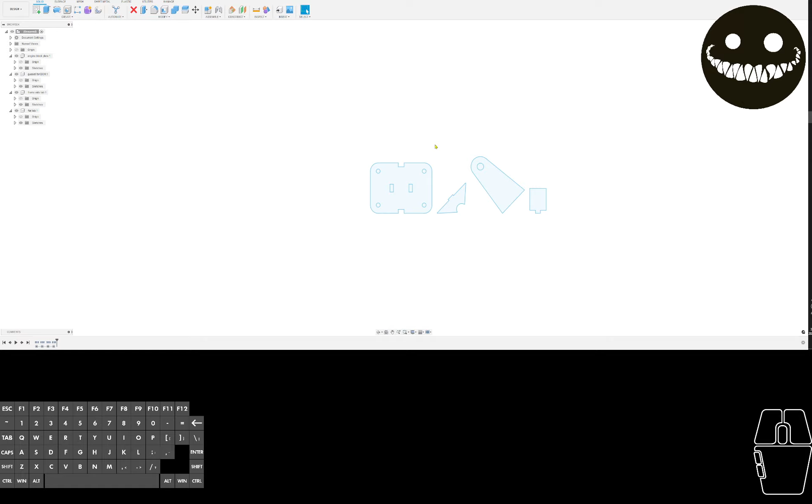3 will be cut twice. I'm going to see which 3 are cut twice. Well, these 3 must be cut twice, I guess. So there's a couple ways you could do this. I would extrude everything first.

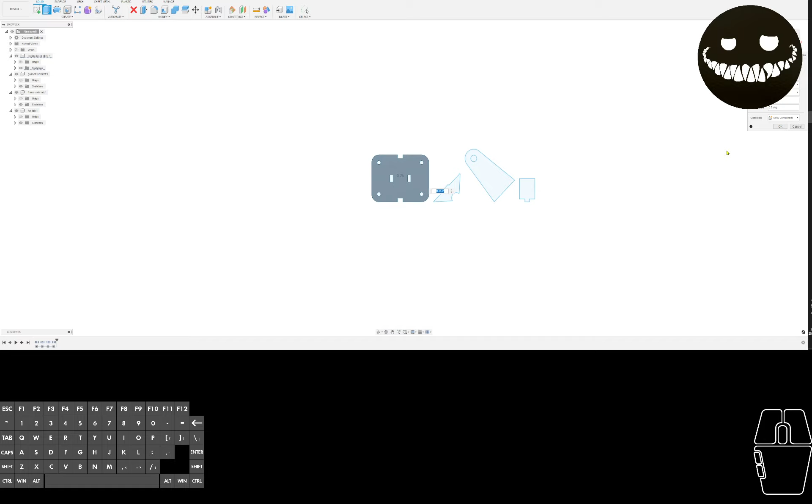No, you're not going to let me extrude from different sketches, are you? Well, that's fine. Let's say it's 1/4 inch material. I'll have to extrude from each one individually. I guess I could just go straight to doing a component from here. Yeah, that's exactly what I'll do. I'll extrude and go straight to a component. 1/4 inch. Just do that again a few times.

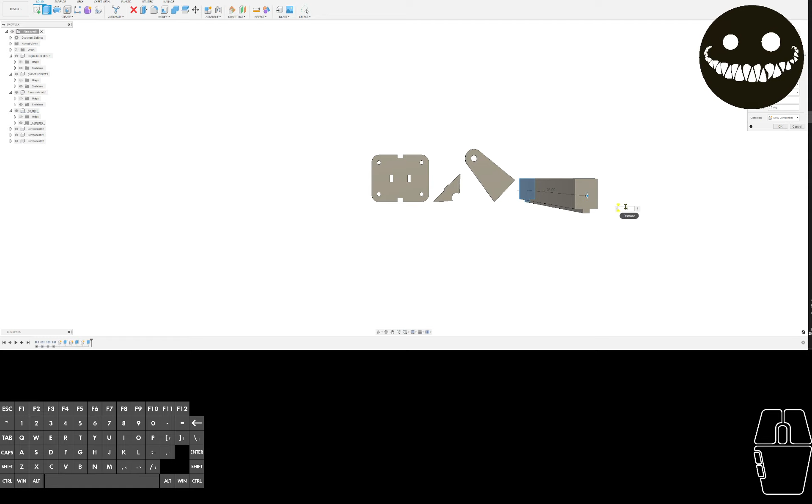But it's okay if they're in their own sketches. That's totally fine. All right, and I want to copy a few of these. So let's copy a few of these.

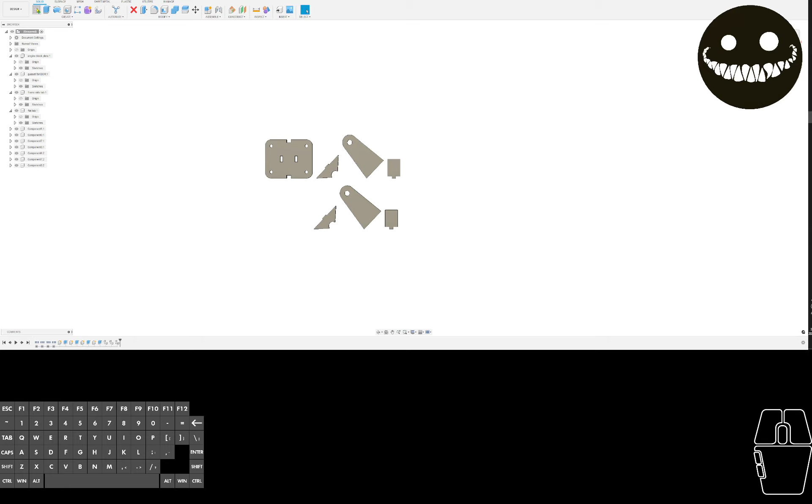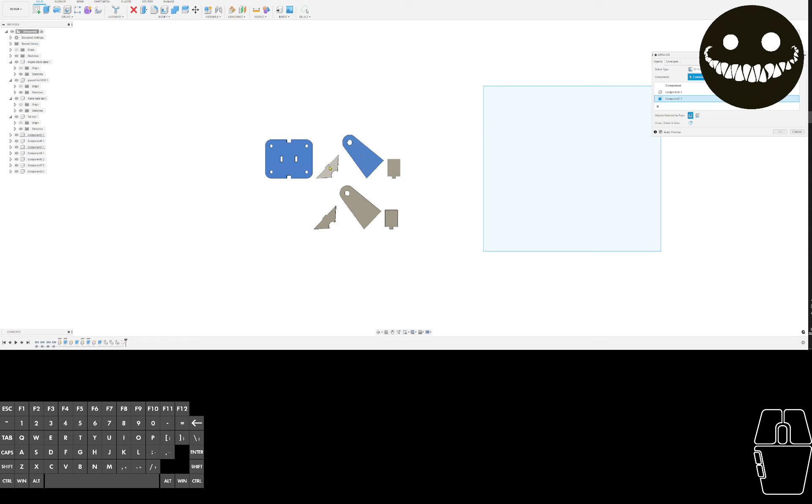Good. Now, if you have the paid version, you could use arrange here, so you're not wasting material. Oops. I was just trying to create that sketch on the XY plane. There we go. Just gonna draw kind of an arbitrary square. Use modify, arrange. Select these pieces. Good.

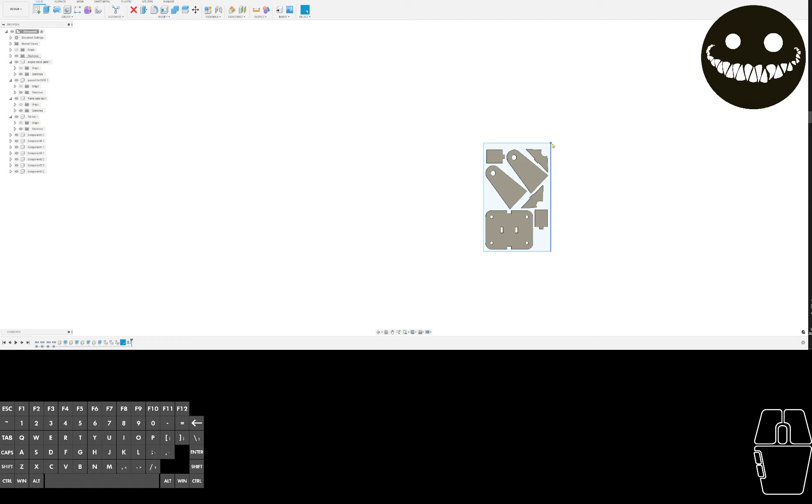Okay, and then I could just adjust this depending on how my stock is, if I have different sizes of stock around the shop. So that's a super convenient way of doing it. But yeah, I think you were talking about that each one had its own sketch over here in the browser bar, because you brought it in as 3 separate sketches. It's fine. You could have opened a sketch first.

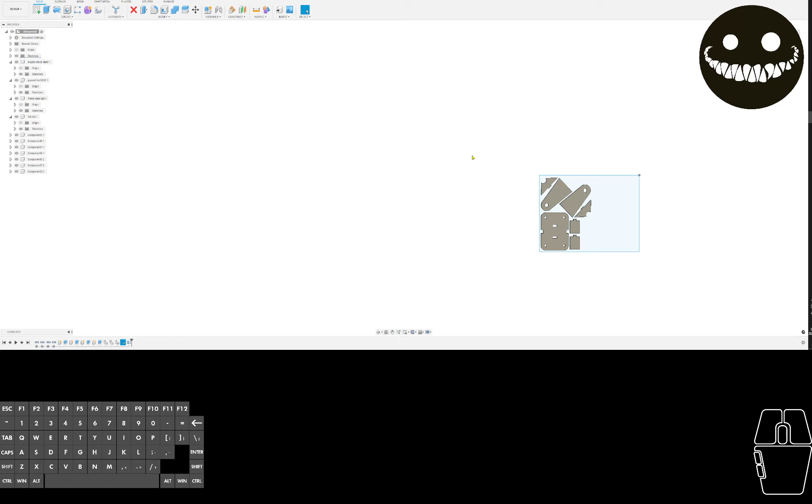So another way to import that would have been, let's say you have a DXF for each one of these parts. What I'm going to do here is save these DXFs separately like you would have had them. So save that as engine block plate 1. And then I'll save this sketch here as gusset for DOM, is that what that said? DOM1.

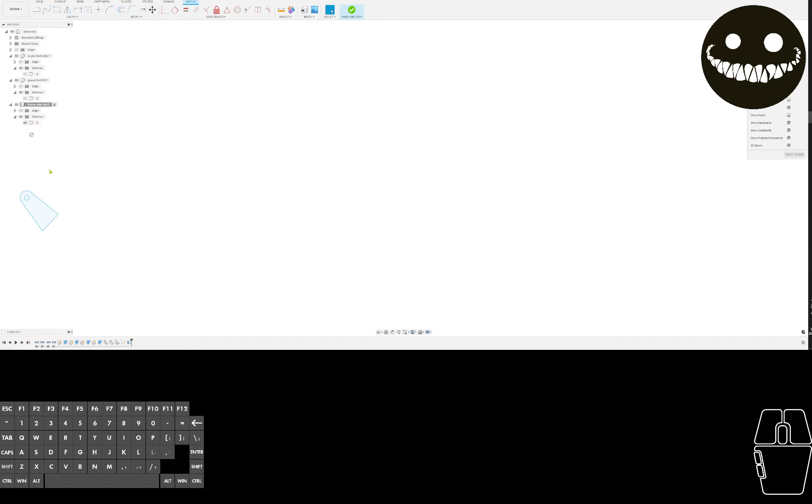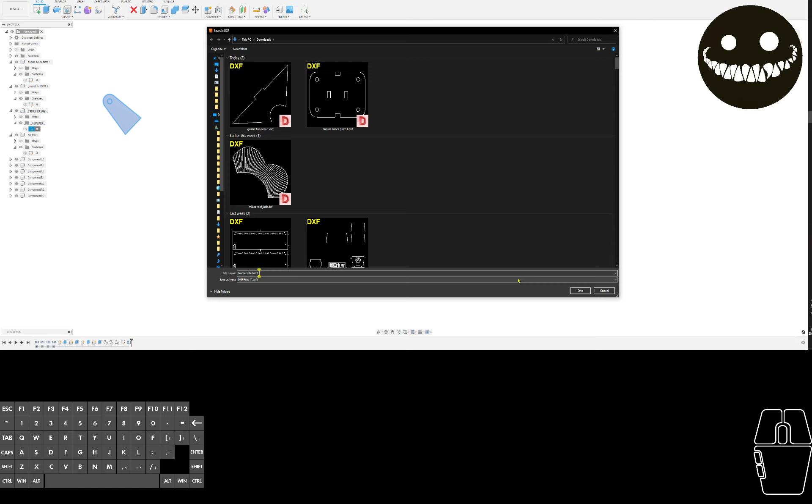Take this one and I'll go edit sketch again. Not edit sketch, excuse me. 1, 2, 3. I'll go into save as DXF, and that was called frame side tab 1. And the last one, save as flat tab 1.

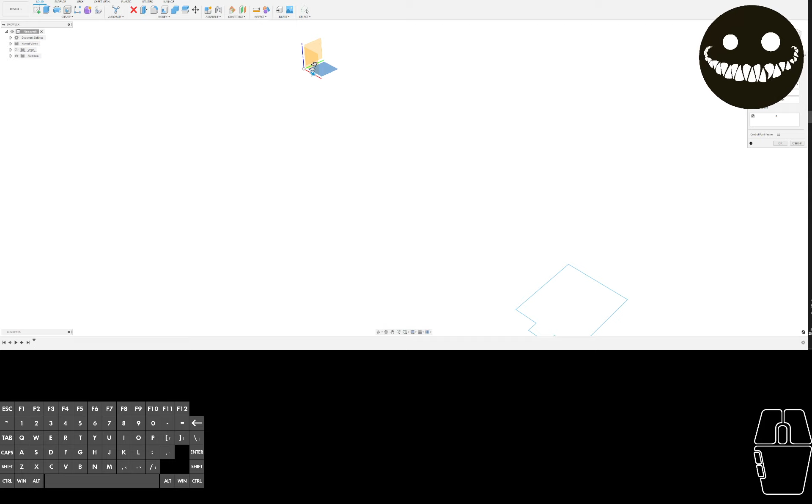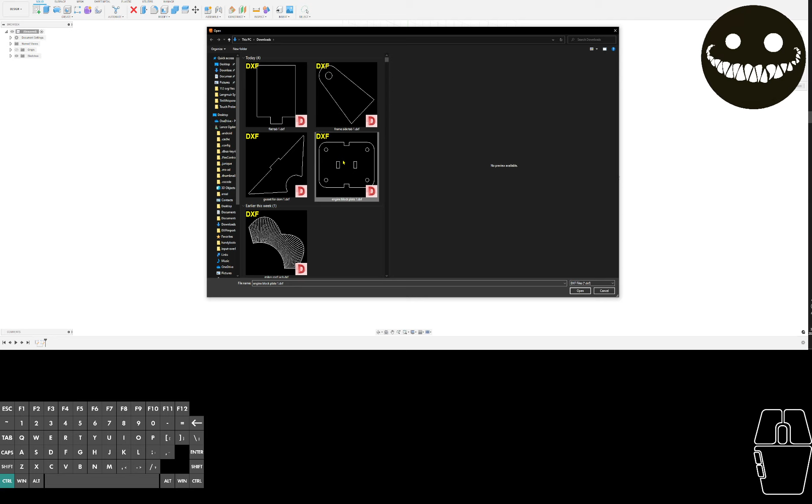Okay, so let's start a new one as if we were doing it the way you started with. You probably just went insert DXF, insert this tab on this plane. And then went OK, and then went insert DXF on this plane. Okay. Can you do more than one at one time? I don't think so. Not in this. Yeah. So the other way to do this would be

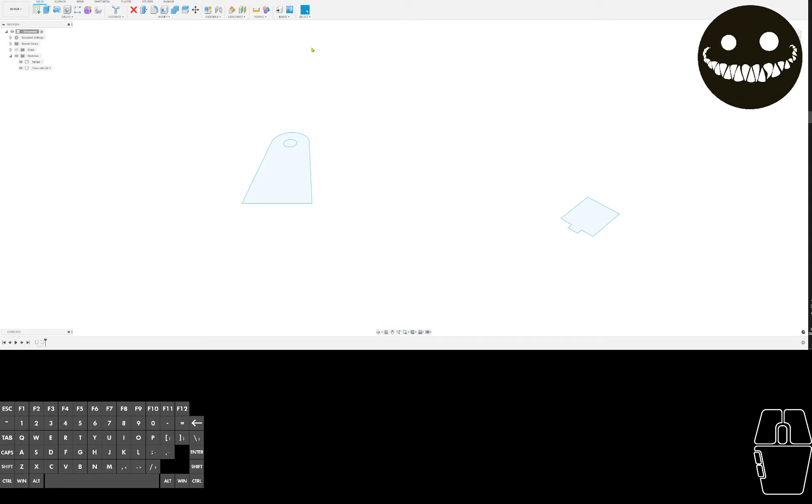so then we're ending up with a different sketch over here for each one, or they're ending up as a separate whole component. I think you could insert too. You might have done that. Let's see what you did over here. Not insert, but just open them. And it only wants to open one at a time there too. But I'll show you how I like to do it.

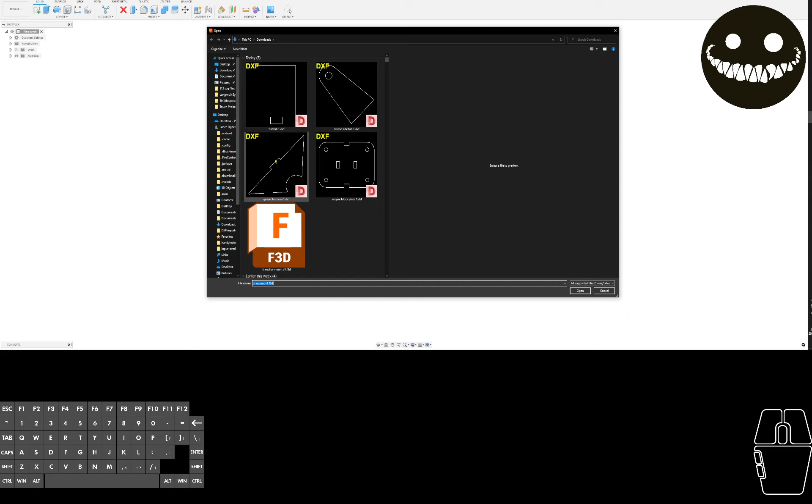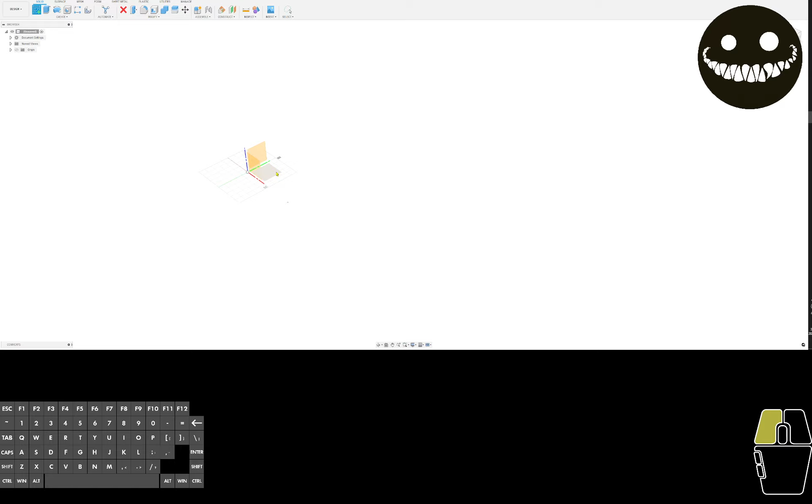Good. Anyways, let's go back here. We're going to make a new sketch on the XY plane, and then I just insert all of them right here. So they just all end up in the same sketch. Open. Okay, it's good. And then I can insert the next one.

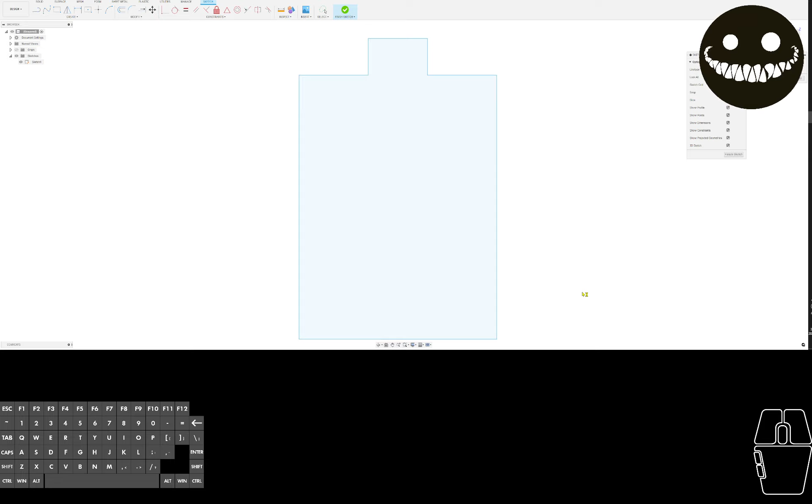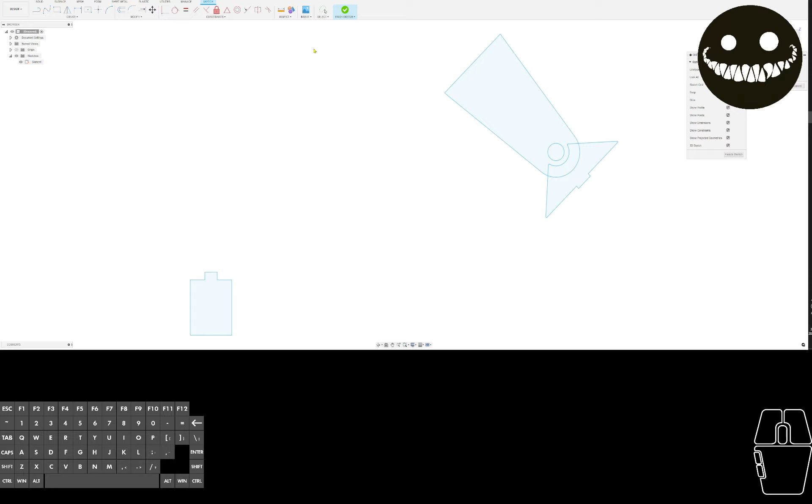Insert the next one. And then they all end up in the same sketch, which may or may not be beneficial to you. Oh, I see. It even shows how it's supposed to fit in there. Insert DXF. Okay.

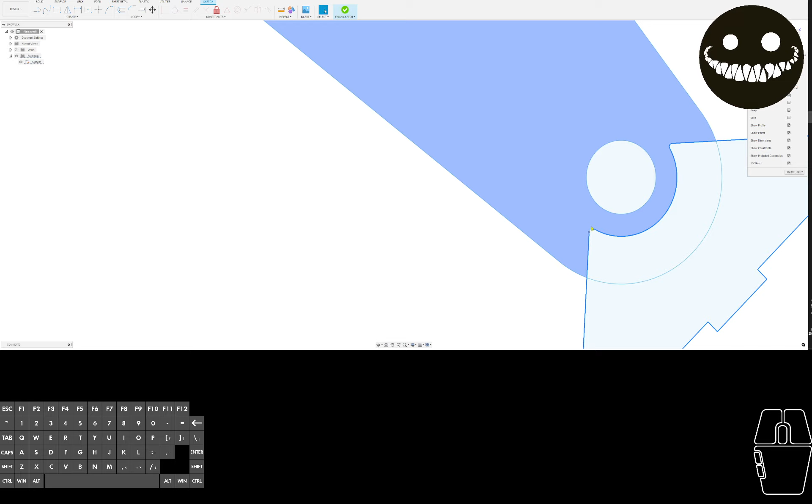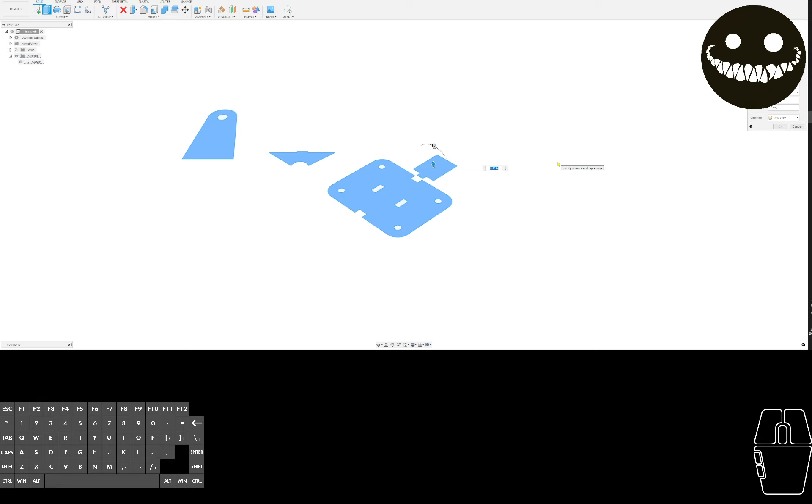Okay, you could do it that way and just extrude from here. We'll be able to extrude all these at the same time right now. And then I just can copy the ones we'd need extras of.

Come on. Move - I want to move bodies this time. And copy.

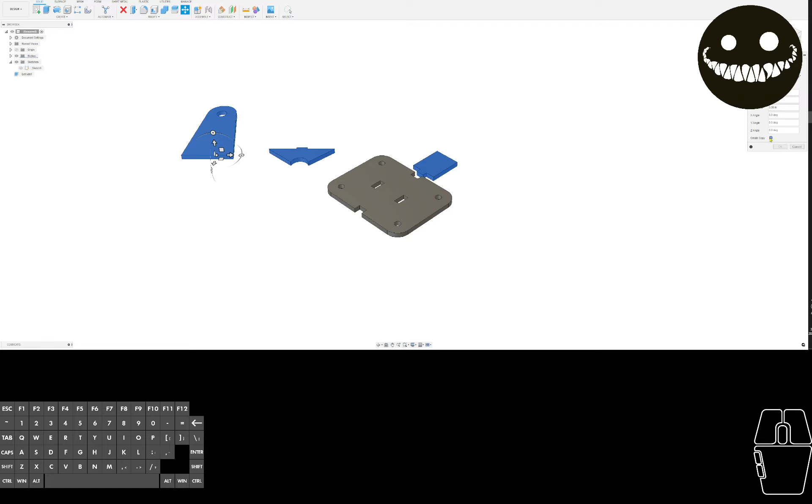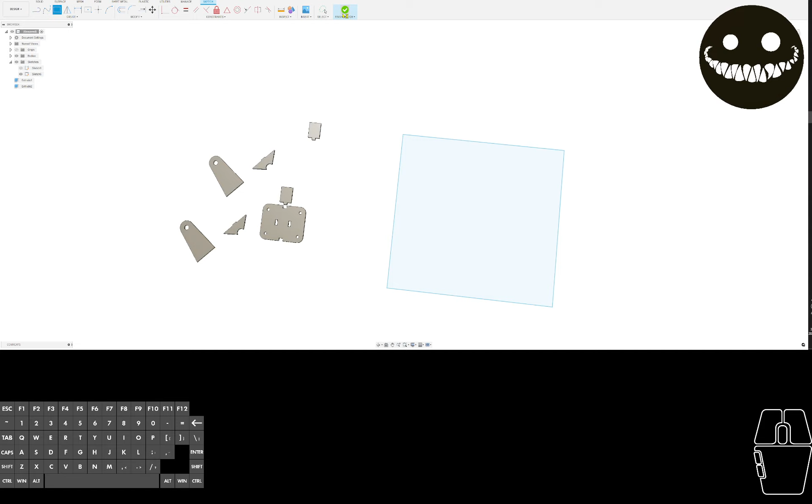You can manually arrange this if you don't have the paid version. So I could just create a sketch on the XY plane, put in a stock size, and I could just grab and move all these to where I need to go, or where I feel they need to go, if I do not have the arrange feature built in, because I'm not a paid subscriber.

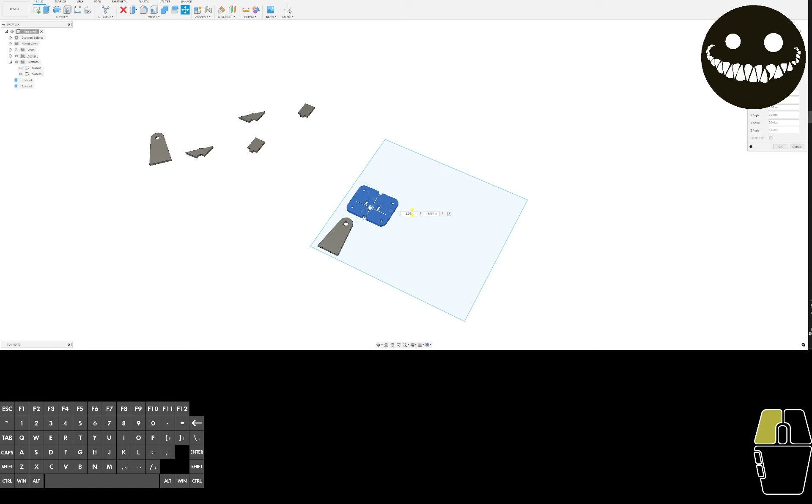You could just manually arrange these things in here. My preference is to turn them into components though.

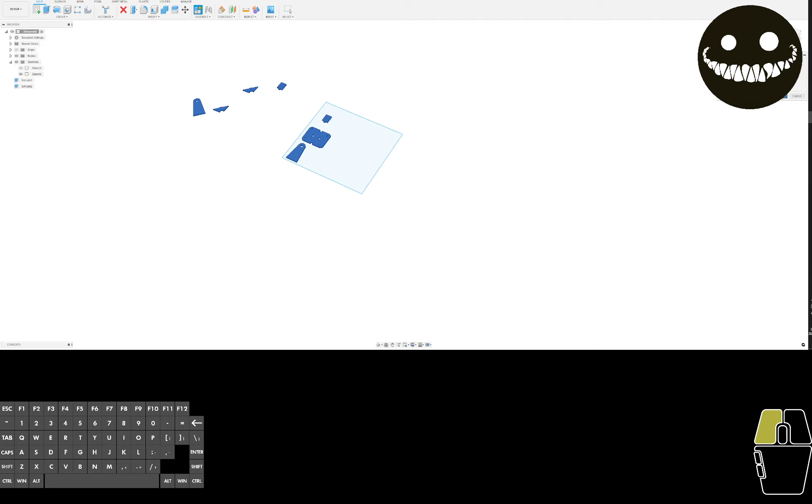Again, I have a paid version, so I would turn those 7 things into components and then just use my arrange function.

And then you could adjust this to however your piece of material happens to be. Usually that should work.

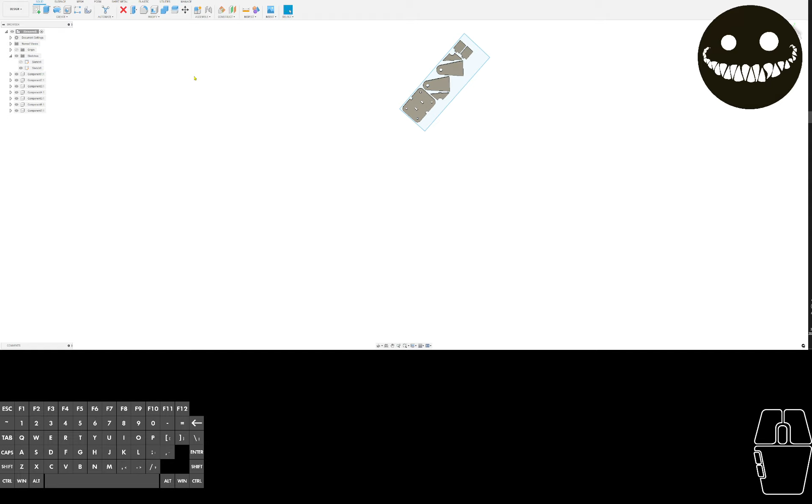Oh, I don't have a history timeline on this one for some reason. That's why it's not doing that. It's not updating because there's no history bar.

How did I lose my history? Oh, weird - the last 2 tabs I opened, because I opened them as a DXF file like that, and it got rid of the history.

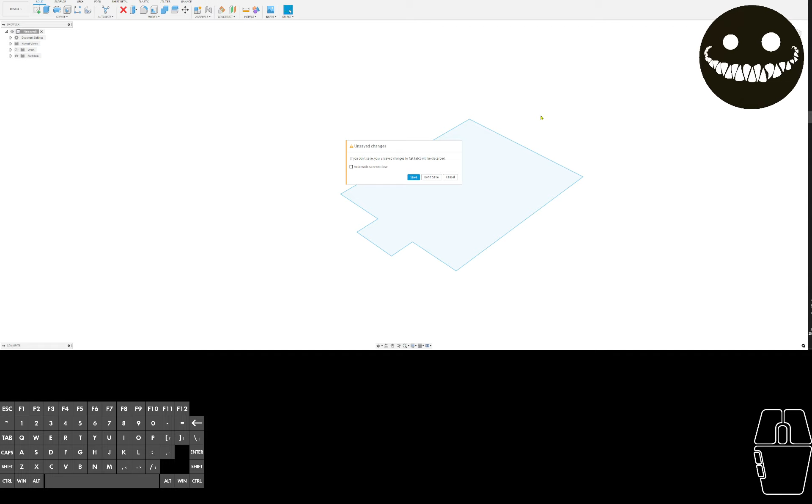Interesting, there's something I just learned. I never open it that way, but this one here will have the history still intact.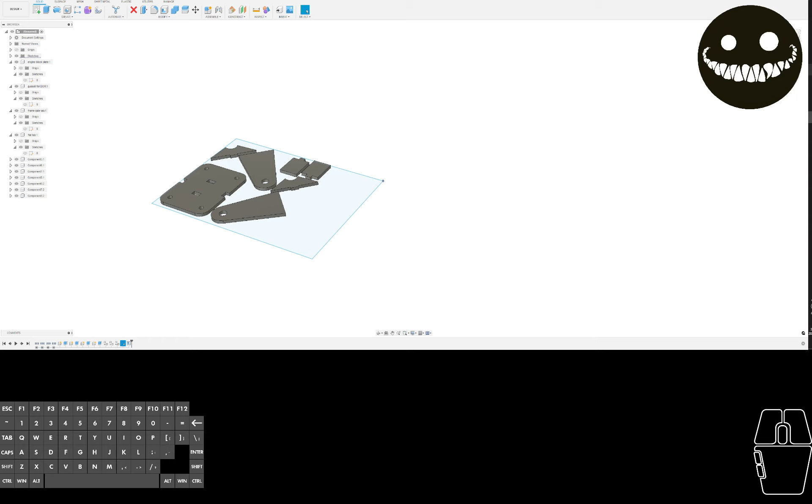So yeah, you can just drag this to however, if you have the arrange, you feel you want it nested in there. There's other arrange programs too. I think that answers the question though. I do like to bring it all in one sketch, for sure.

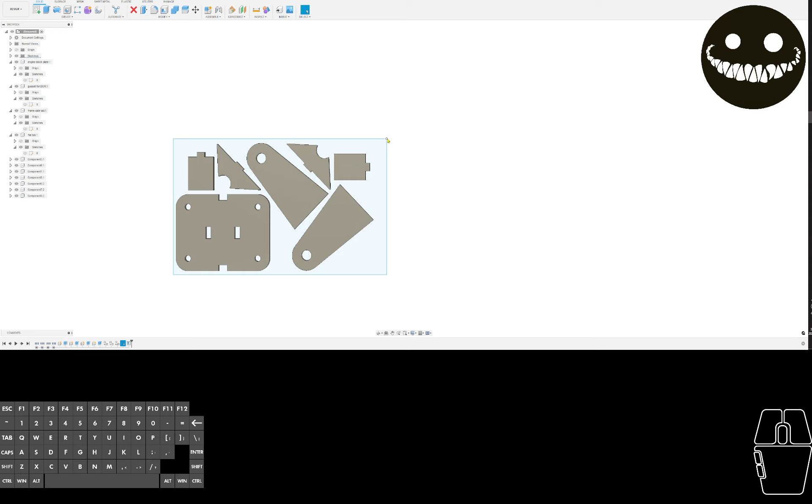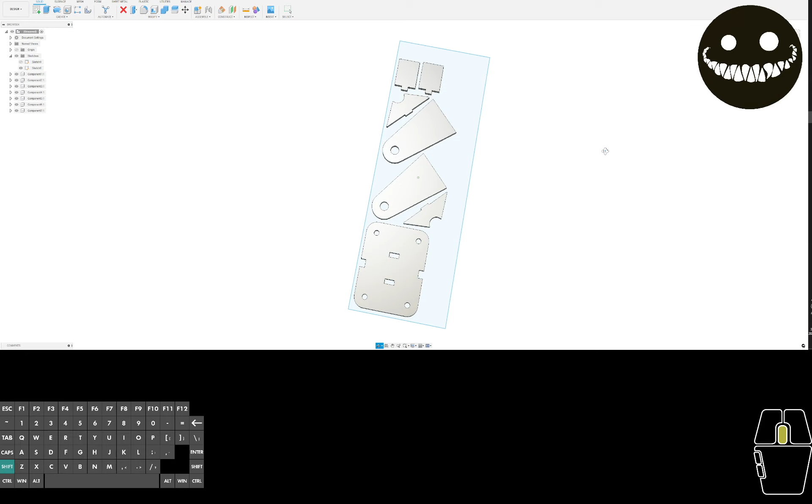It only rotates them at 90-degree angles because that's the way it works. I think you could, if you wanted, though - let's try this. Let's say you didn't have that arrange program. We'll go to this one where the arrange isn't working because of the lack of a history.

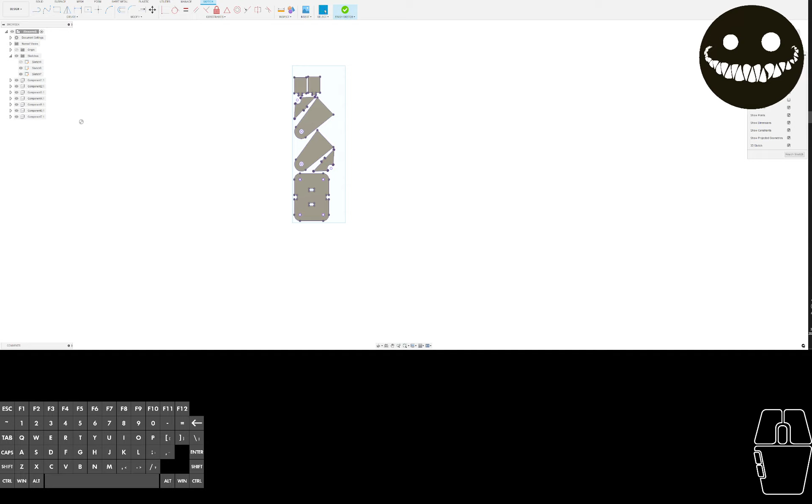And we'll just take this one and we'll project all this stuff, these different parts. Okay, finish, and I'm going to save that sketch as a DXF and call it LS mounts 7 parts.

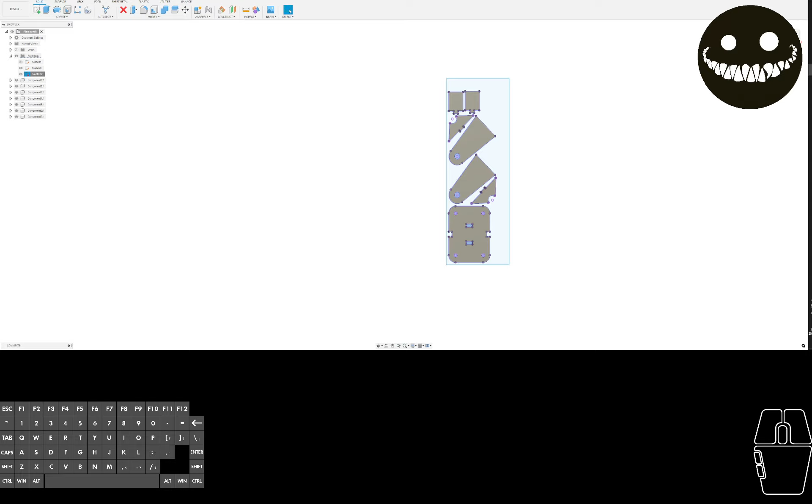And then we can go into DeepNest - is it .io? Yeah, it is. So here's DeepNest. Download.

Oh, I haven't used it in a while. It used to just be browser based. Oh, or maybe I still have it on this computer. Oh, I do - never mind. You got to download it.

And I will import that DXF. And it's seen it as 7 parts, and they look really small.

Inch and a bit by an inch? No. No, those are too small. Half an inch? No.

Okay, let's go in here. Let's see if that makes any difference. Huh, I wonder why they seem so small. I think Kinnick was having this problem the other day.

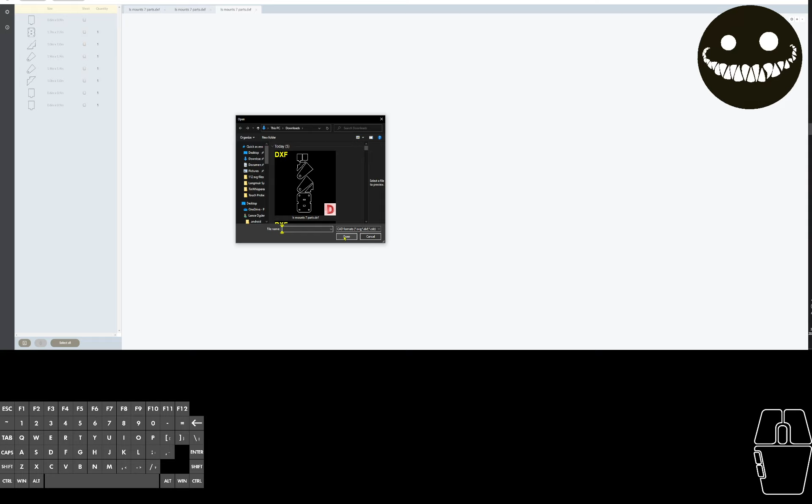Oh, that's because this units is all off - 72, let's try that. And now we'll import that again. That's more like it.

Okay, let's delete all this stuff. Select all, delete, and we'll just import it. Yeah, it's the scale factor was wrong - SVG scale 72. I don't know why that affected me importing a DXF, but it sure did.

So anyways, let's import that again. No, you're not going to let me import anything? Okay, let's open you again.

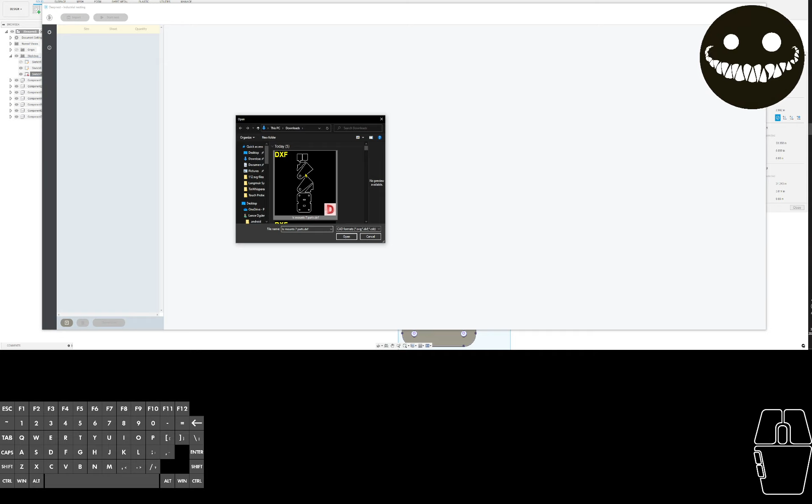Anyways, this is the program you can use if you don't have the paid subscription to Fusion 360. And normally it works pretty decent.

So now, okay, that looks good. Part rotations - yeah.

We're going to add a piece of stock - say 15 inches by 15 inches. Add. This is our sheet, and now we can start nest.

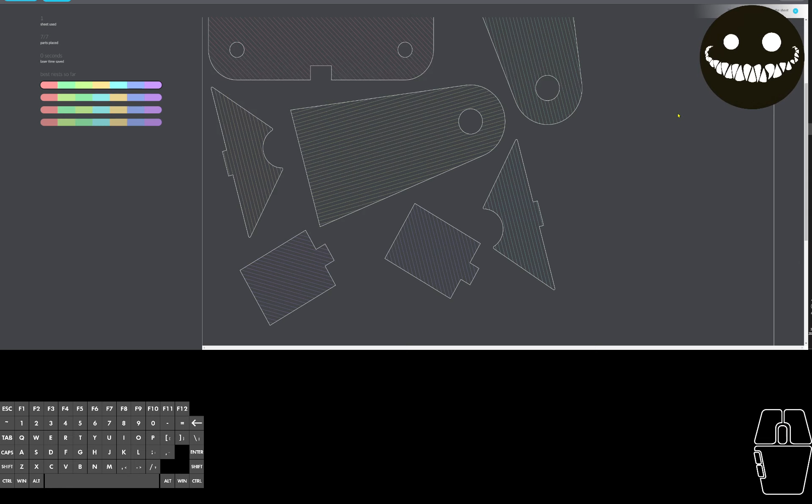Of course, it's all zoomed in, but oh, it's not. So now it's crunching through, trying to give us some good iterations, nice and tight.

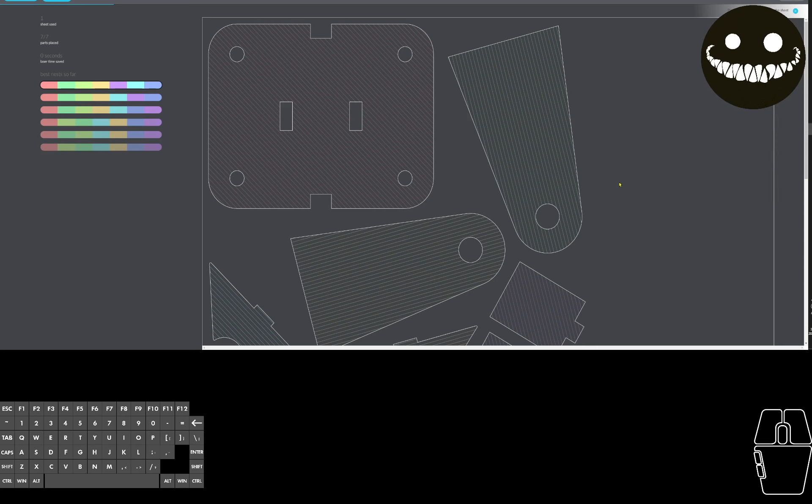It's not going to get any better than that. Export, just do another DXF file - LS parts. And now let's see if there's any difference.

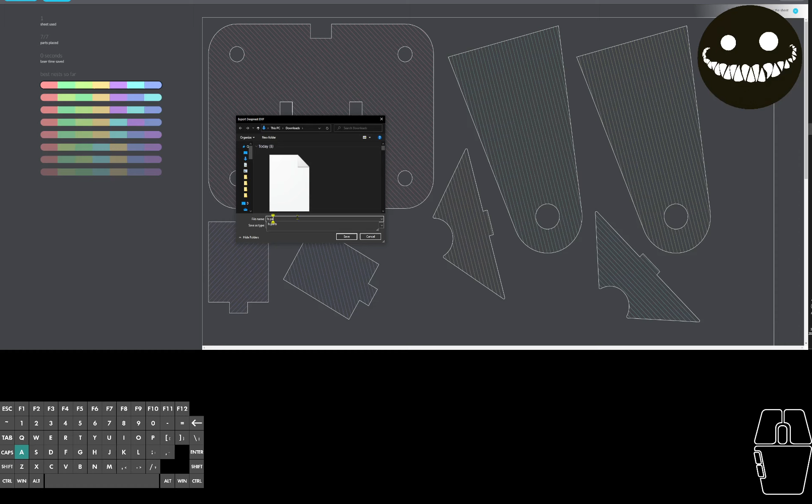I think that 72 is the right scale though. Where did that save though? Weird, made me have to manually write that in.

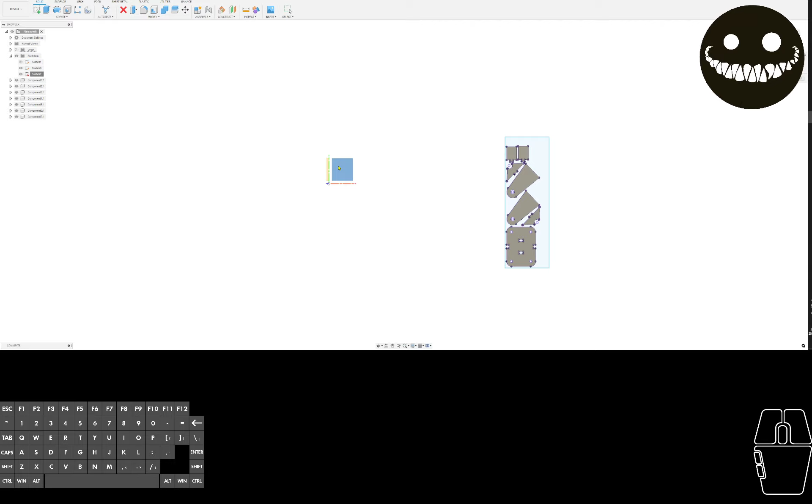Nice, so now I can just drop that back in here and good to go. Yeah, it's 72. Is that about right, eh? Wouldn't want to get that wrong, I think. Yeah, scale's good there.

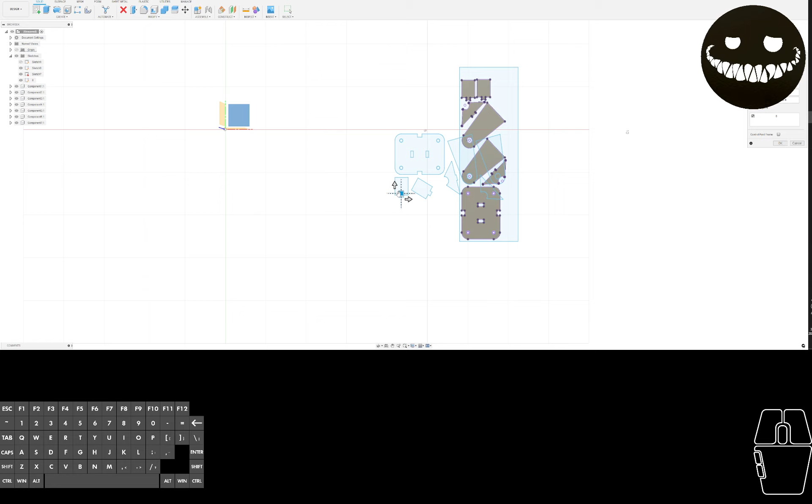Okay, trying to figure out how there's two. There must be something in between.

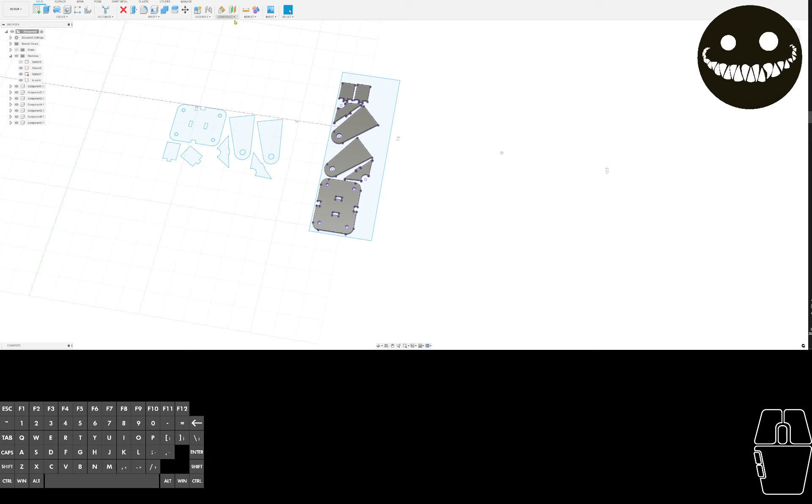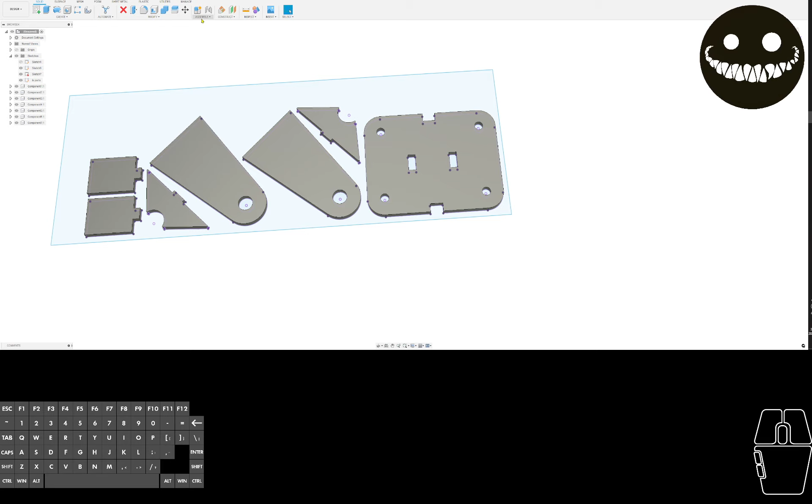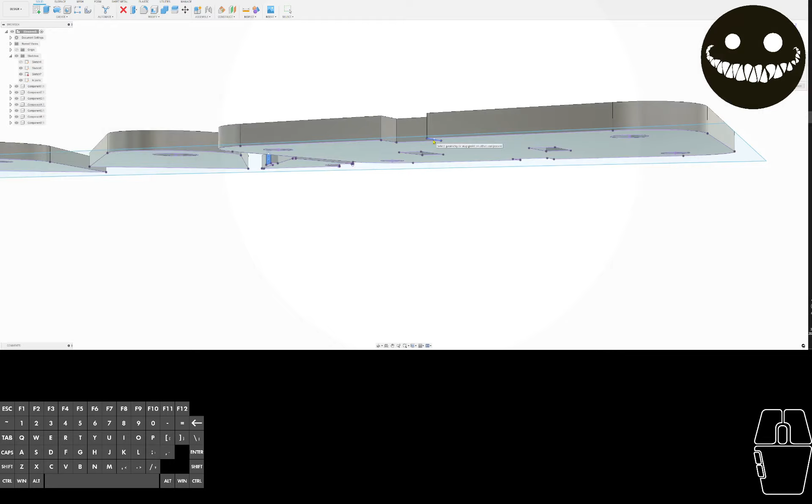Here, let's take these parts. Oh, those are in the middle. I see.

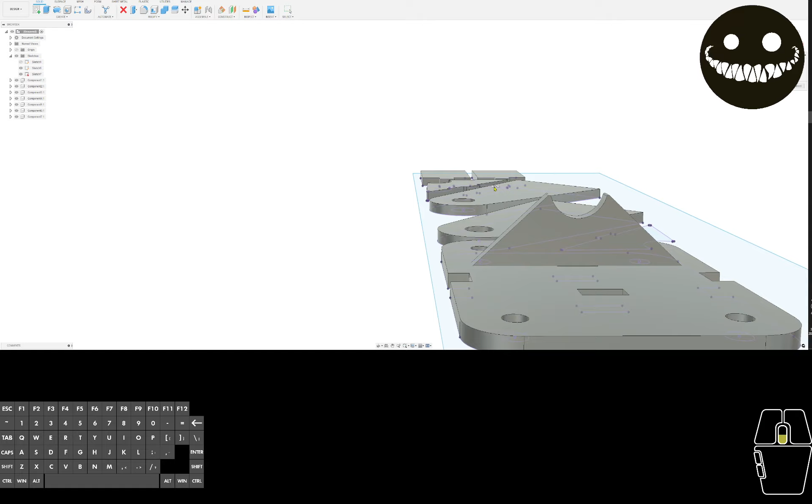Okay, repeat a line, put that other one in there. Really, you should properly be using joints, but it's not what I'm doing.

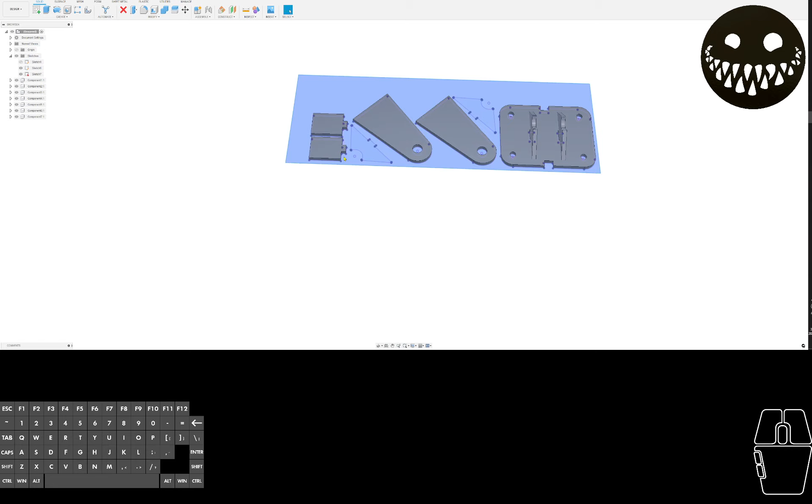And these are some kind of tabs. Not even sure what these tabs are for.

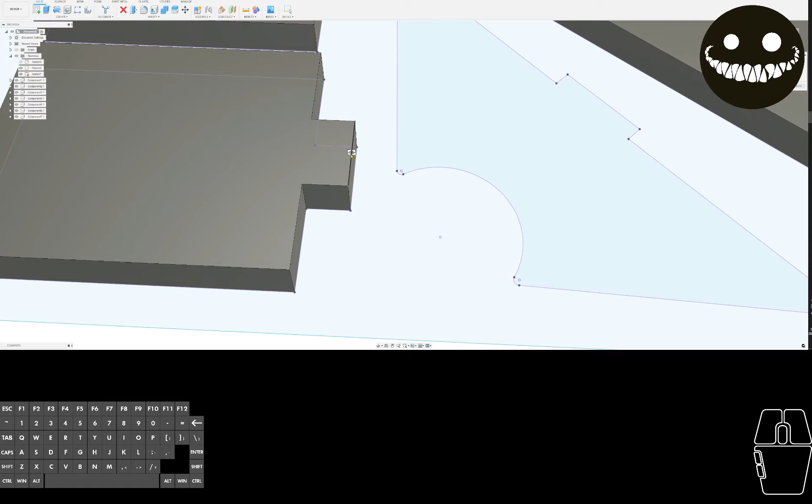Sometimes it's nice to have some reference edges. There we go - flip. Yeah, I have no idea what I'm building here.

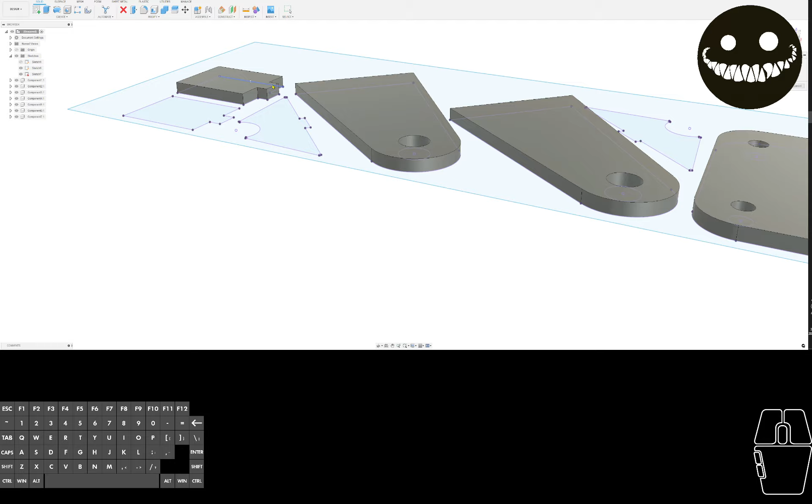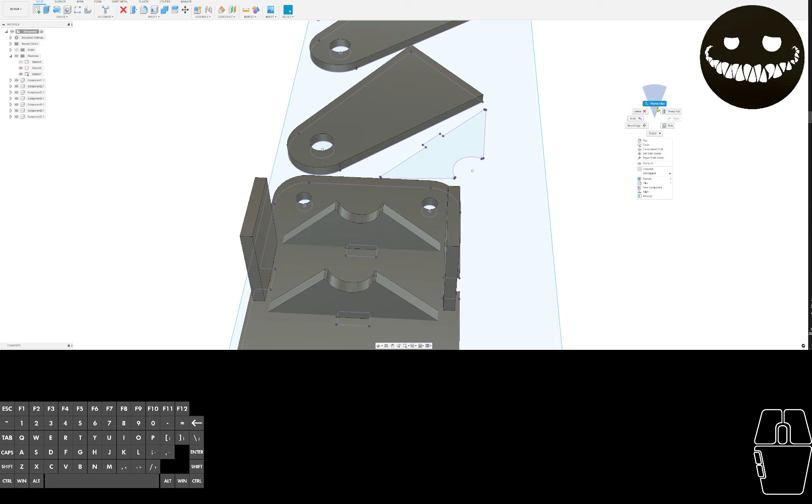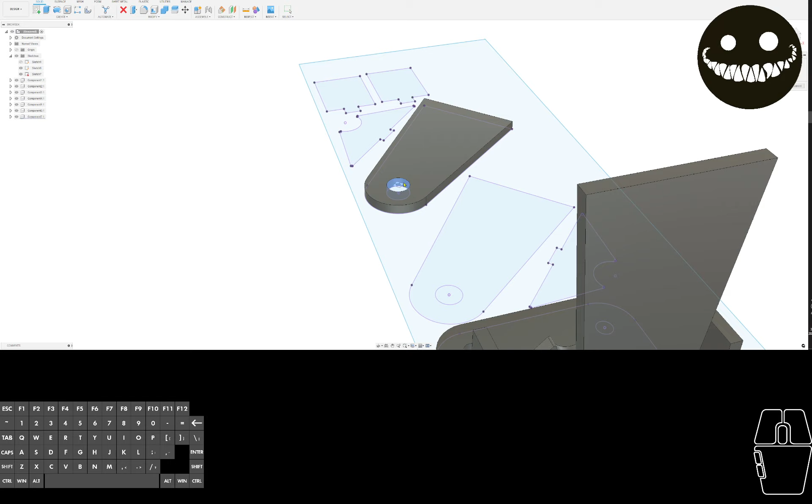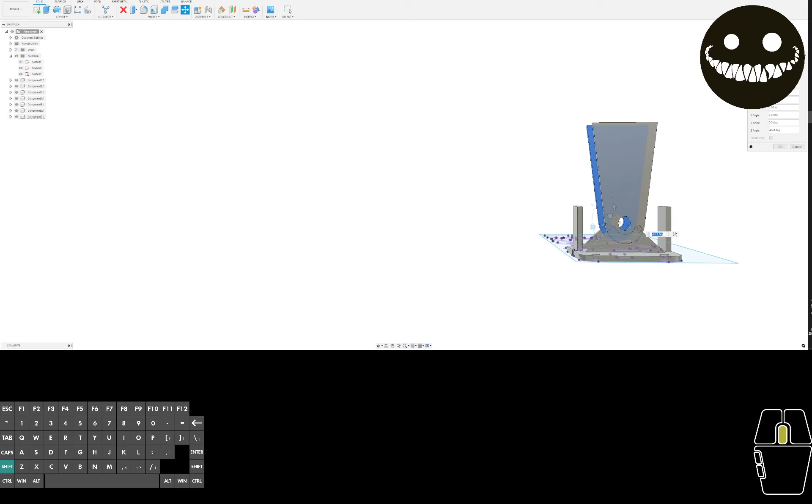Weird. Different. Move. Probably just laughing right now because I have no idea what I'm building.

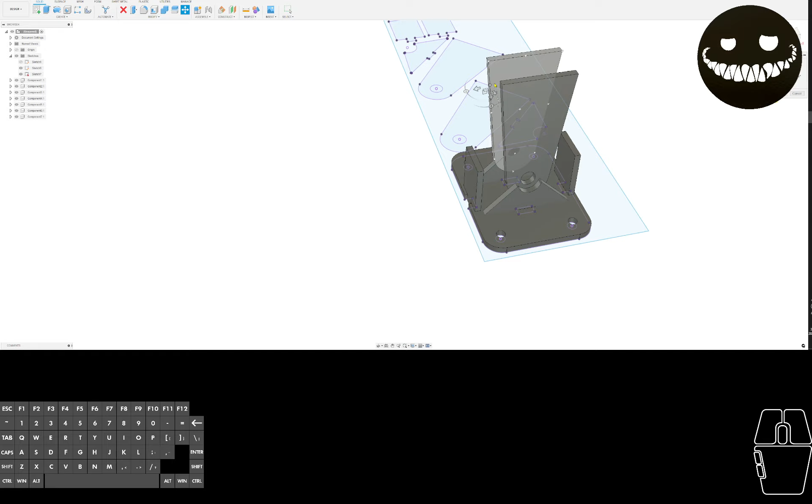There we go - maybe that's what that mount looks like. I'm gonna look it up.

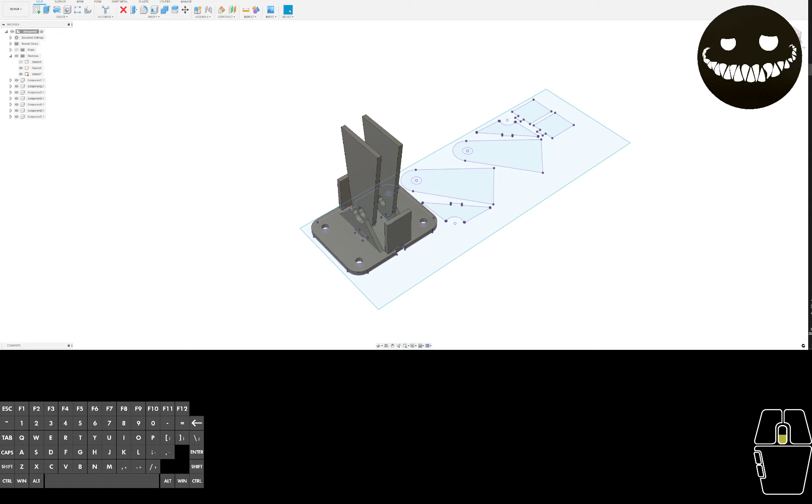Oh, that's what they look like, eh? Like this, when it's all said and done. I see. So what the hell are the other two parts for?